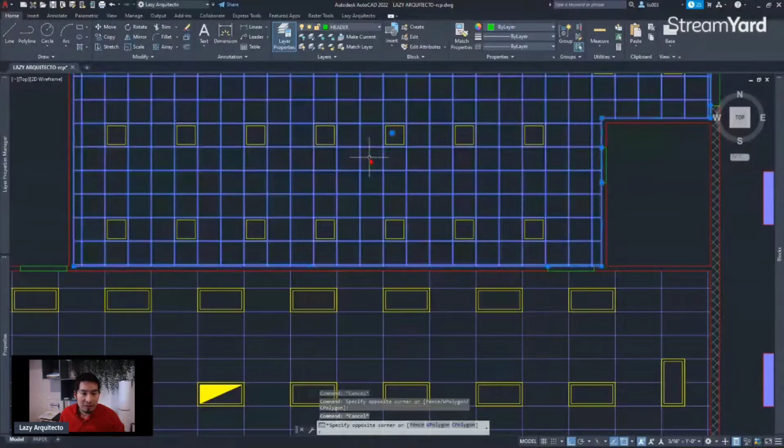So I found this drawing the other day where the ceiling grid is made out of full of lines. People are still wasting time with examples like this, instead of using a regular hatch for the ceiling grid, they are using single lines. It's not their fault, probably because AutoCAD doesn't have a ceiling grid like this by default, but they do have one. So probably they didn't know how to create it. That makes me sad because I know for sure people are wasting time creating these ceiling grids line by line.

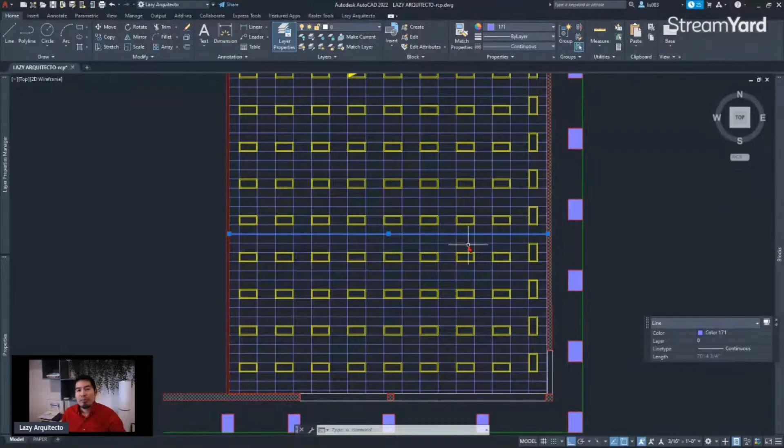So today my plan is to show you how to create custom hatches. First I'm gonna explain an easier way, and then the second way is gonna be more complex and advanced, including coding. And finally, I'm gonna give you some troubleshooting tips and tricks to create your custom hatch, because it's a little hard or complex in AutoCAD, so you can finally create the hatches you wish. All right, let's start.

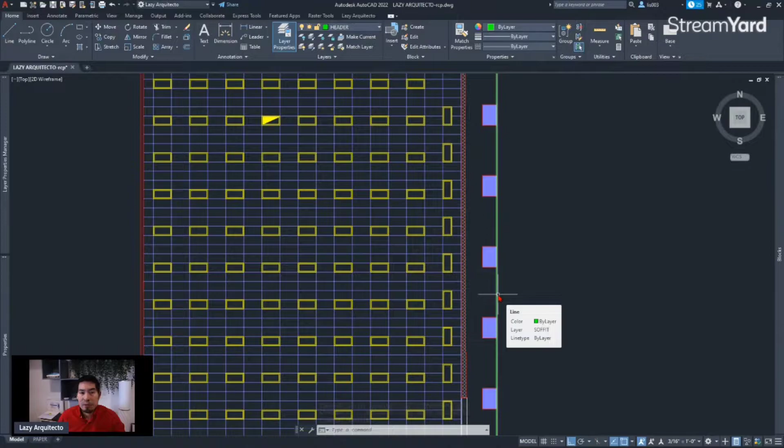Let's start with the first way to create custom hatches in AutoCAD. For this, we need to create a block. First, what we're gonna do is create a square using the regular line command that is 1 unit.

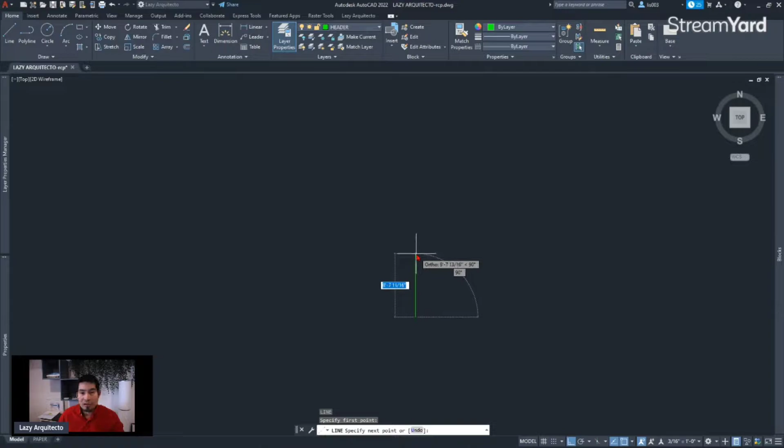So 1 unit up, and then 1 unit to the left, and then close that square of 1 unit. It depends on your AutoCAD units. Right now in this drawing I have inches as my units, so that's what AutoCAD is using.

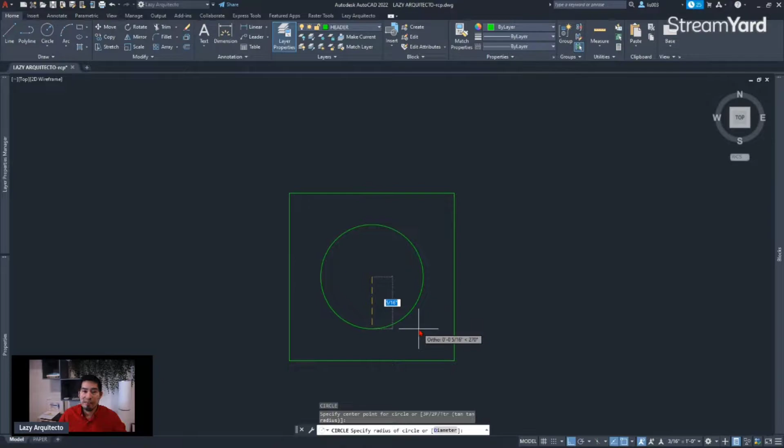All right, once we have this square, we're gonna create whatever object or shape we need for this hatch. For this example, I'm gonna simply draw a circle using the circle command. I'm gonna come here and, using my extension lines, place it in the center like so. For the size, it doesn't really matter, this is just to give you an example. So I'm gonna click like so.

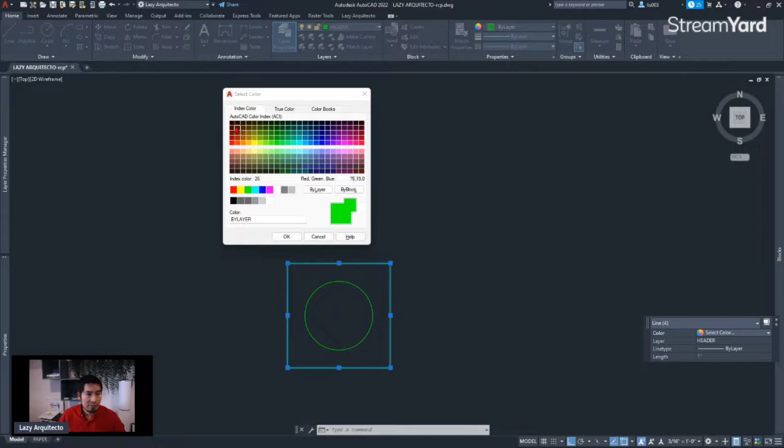Again, the square is simply a guideline, so I'm gonna change the color just so you don't get confused, and make it very light, probably something like this. That's a guideline I need to create my hatch, but I want the circle only to be my hatch.

Okay, once we have that, let's simply create a block using the B shortcut and press enter. Let's call this circle hatch or whatever, this is just an example, but you can create any shape that you need.

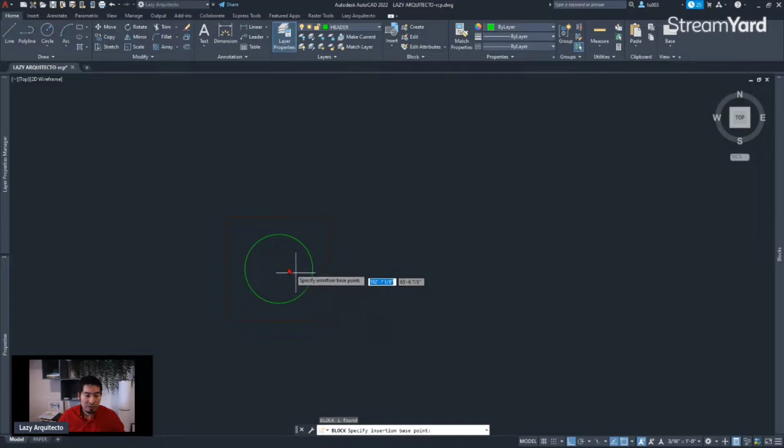Once we have that, let's specify the insertion point. The insertion point for my circular hatch is gonna be over here in this corner. I'm gonna click there, and I already have my block.

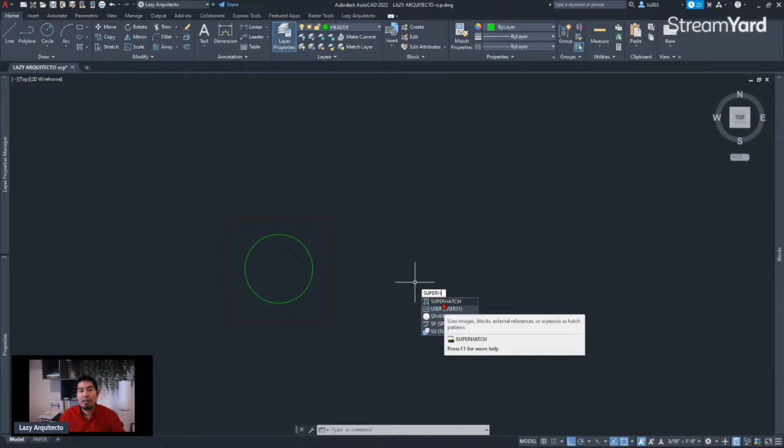So now to create this custom hatch, I'm gonna simply use the super hatch command. You can also find this command on the ribbon. If you go on Express Tools, you will see it over here, super hatch.

If you click or start the command here, we have many different options, but what we want to pick is the block option. Once you select block, automatically your last created block is selected over here, circle hatch. If it didn't select it, you can pick block and find it over here, select circle hatch, and click OK.

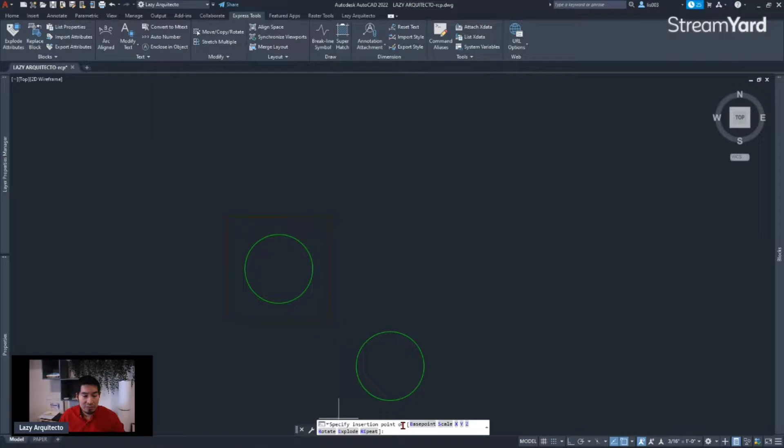At this point, pay attention because we need a lot of steps to create this hatch. Just pay attention to the command line and the steps that we're gonna need. Once we have that, let's follow instructions on the command line, and it says specify insertion point. So the insertion point that I want is gonna be over here.

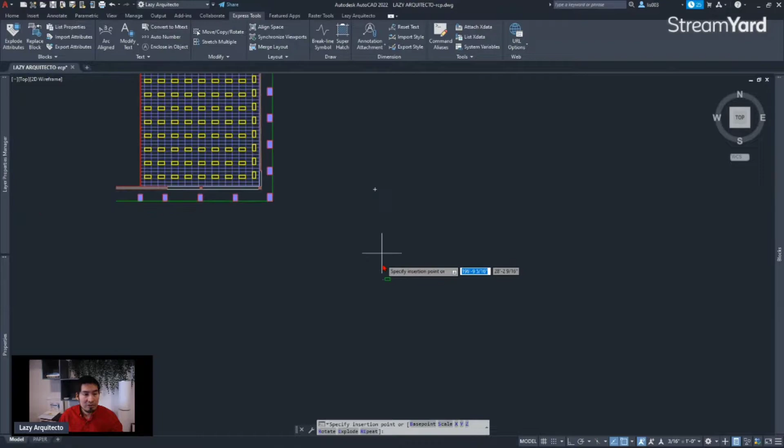Sorry, the insertion point is of the area that we need to hatch, right? So I draw a big square over here, so the insertion point would be in this corner. That's what I wanted, so I'm gonna click here once.

Then it says specify a scale factor. I wanted to have it as 1, so I'm gonna type 1 and press enter. For the Y scale factor, also 1 and press enter. For the rotation, 0 and press enter.

Okay, so it says, is the placement of this block acceptable? I'm gonna say yes. And now here on the command line, it says first corner of magenta rectangle, right?

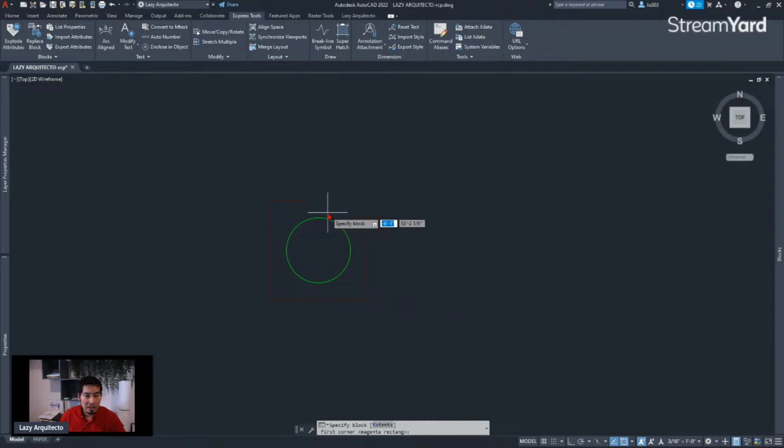So for this, I'm gonna need the guidelines that I created before. So the first magenta corner is gonna be here, click, and then the other magenta corner is gonna be over here, click. So once I have that, it says specify first corner again, but it's a little confusing, but we already did, so just press enter.

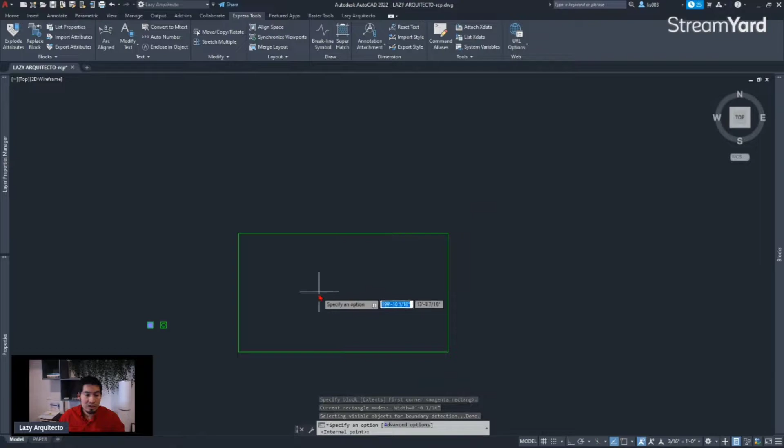So now it's asking for the internal points. Of course, that's the area that we want to hatch. I'm gonna click over here and then press enter.

So once I do that, again, more steps. Are you sure you want to do this? Yes, of course. And then AutoCAD is starting hatching this object with our circle block that we just created. So again, as you can see, it's right here.

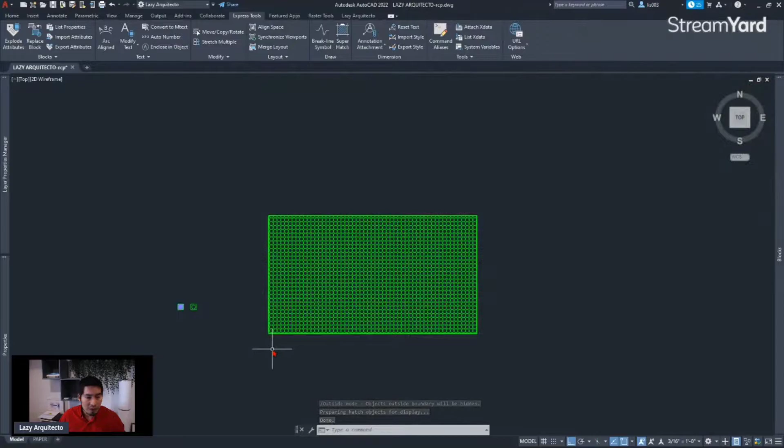But again, it creates a group over here, if you see on the property lines, which is one of its disadvantages. So the advantage, of course, is that using the super hatch is easier, but the disadvantage is that this is a group and not actually a real hatch. A real hatch, of course, you could use in another drawing, but in this case, for this hatch, you cannot. Why? Because if you explode this, it's simply a group full of blocks or circles. So that's why we need the second option to create a custom hatch.

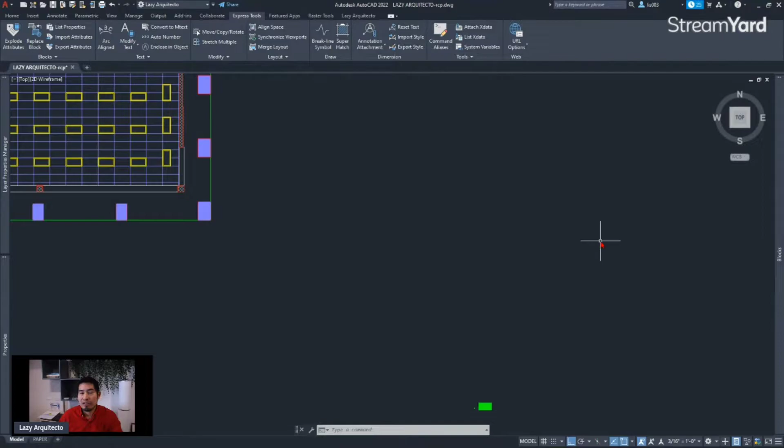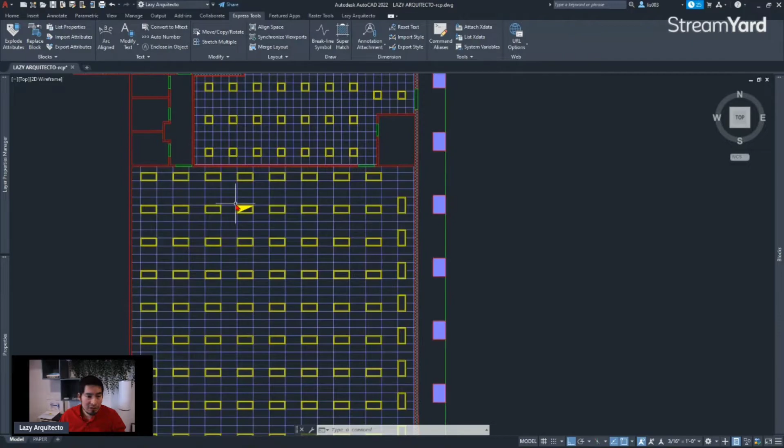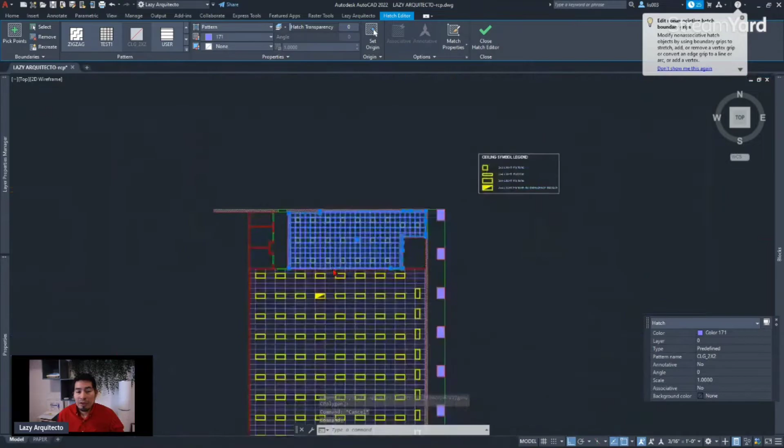All right, so let's start with the second option, which is a little bit more complex, but it's worth it. Let's start with the second way to create custom hatches. For this example, I'm going to create this hatch 2x4, which is very useful for ceiling grids. AutoCAD doesn't have this hatch, only has the 2x2 grid. Okay, so let's start with this one.

So I want to start this hatch, but I'm not going to start from scratch. Again, my idea is always that AutoCAD should already have a hatch code inside, so I need to find it and start from there. I'm not going to waste time starting from a brand new file and creating my own code, no way. If you are here in the Lazy Arquitecto, you should know that already, that we don't like to waste time, we want to save time.

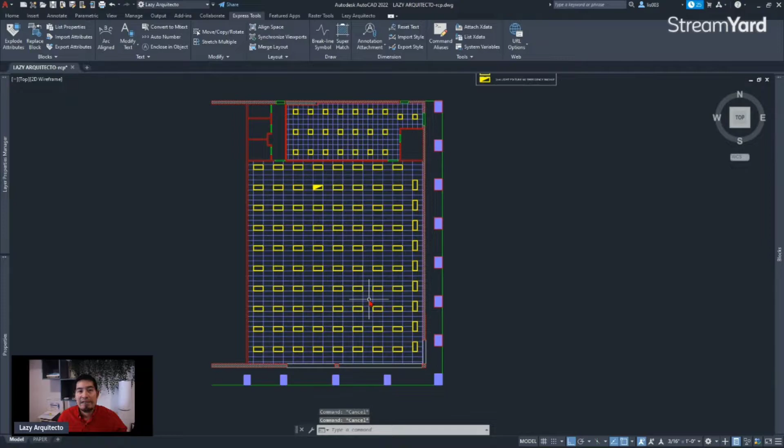So that's what we're going to do. We're going to find the code that AutoCAD uses for creating hatches, and we're going to reuse it to create our 2x4 ceiling. So let me show you. Let's find a similar hatch to a 2x4, right? So let's use the hatch command and go here on the hatch patterns, and let's try to find a useful hatch that we can start similar to a 2x4. And I believe it is this one.

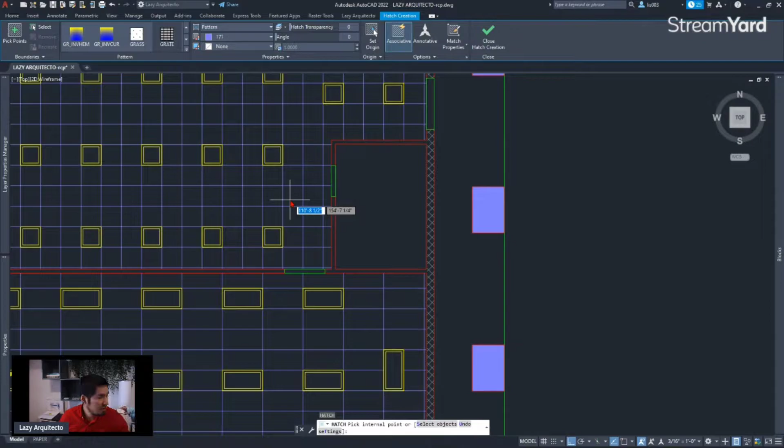Great, so this one is very close to a 2x4. And then, if you get closer, you can see it.

Again, you can see this GRATE hatch. It is close to what we need, so we're gonna reuse this. Remember, the name is GRATE. So what we're gonna do is go to the options, type OP and press enter.

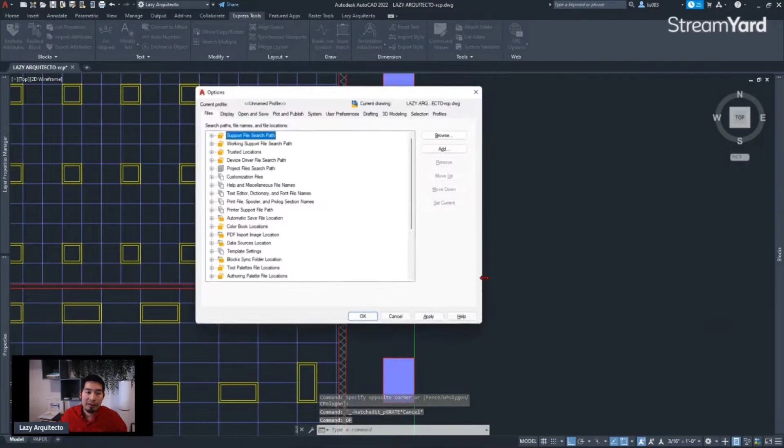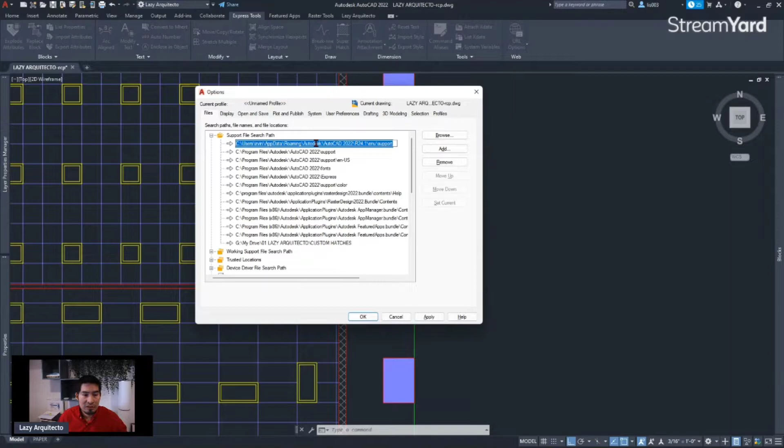On the support file search path location, based on my experience, I know the hatch patterns or hatch files where the code is stored, it's on this path. So what I'm gonna do is press F2 and Control C to copy that path. Once I have that path, I can simply close this.

Now what I'm gonna do is open a Windows Explorer folder. It's right here, and I'm gonna paste that path. Once I do that, simply press enter. The hatches or hatch pattern file is gonna be over here.

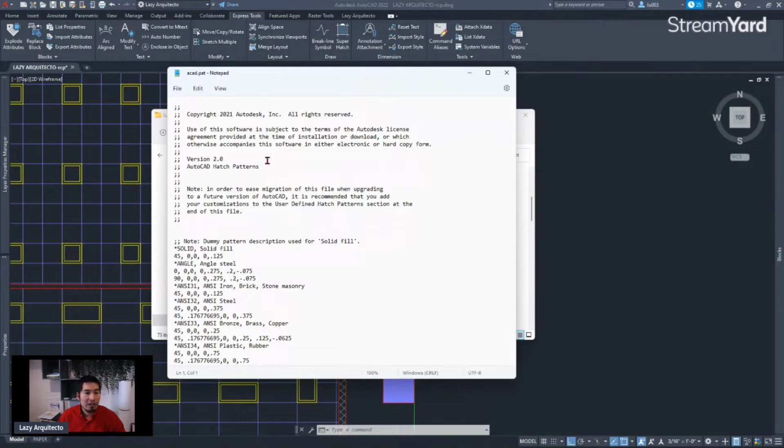So let me find it. You can recognize it because it has the PAT file extension, so that's how you know it's a hatch pattern file. It's right here, acad.pat. Let's open this. I'm gonna open with Notepad. Once I open this, I'll have this file, and I found it. I found the code for all of the hatches inside AutoCAD.

As you can see, this is the coding that AutoCAD is using to create those custom hatch patterns. And of course, a 2 feet by 4 feet ceiling grid doesn't exist in this code, but we're gonna create it.

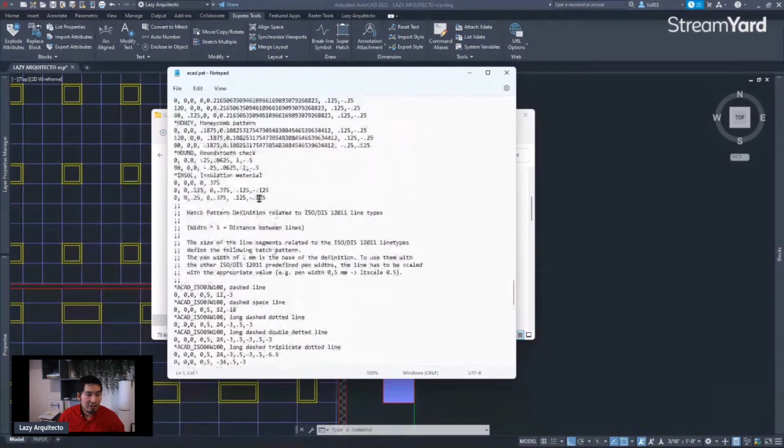So let's find the GRATE hatch pattern. Instead of looking for it, I'm gonna click Edit and Find. Over here I can type GRATE and then press enter, and here it is. We found the GRATE code that we need.

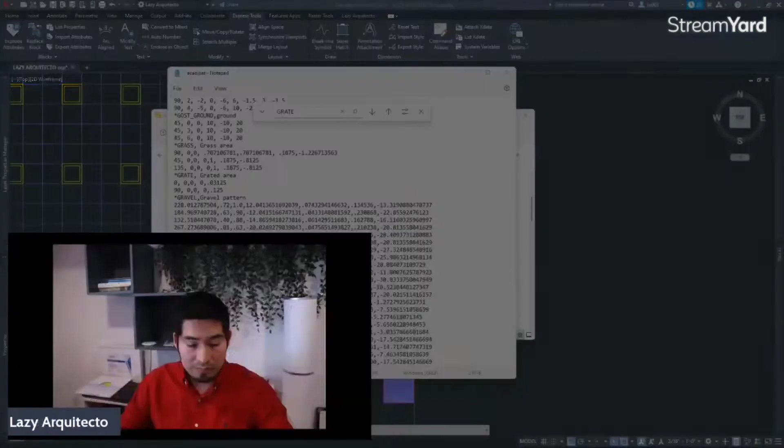So over here, first I want to tell you something important. I'm sad that many people who teach AutoCAD usually suggest creating your code and putting it in this file. But the reason why I would never suggest that is if you create a custom hatch pattern and add it to this file, whenever AutoCAD is giving you problems, you're going to have to probably restore AutoCAD to defaults and lose all of your custom hatches that you probably spent a lot of time creating. So you never want to do that.

Let me show you a way to create your custom hatch patterns and save it in a location where it doesn't matter if AutoCAD crashes or doesn't work and you need to restore it, you're still gonna have your custom hatch patterns saved and secure. Let me show you that.

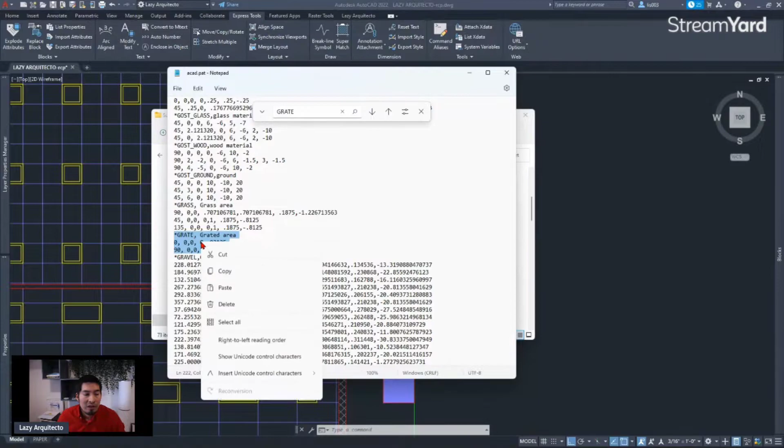So what we're gonna do is copy this grate hatch pattern code up to this part, because over here starts the other hatch, which is gravel. Once we have that, let's simply copy that and we can close this.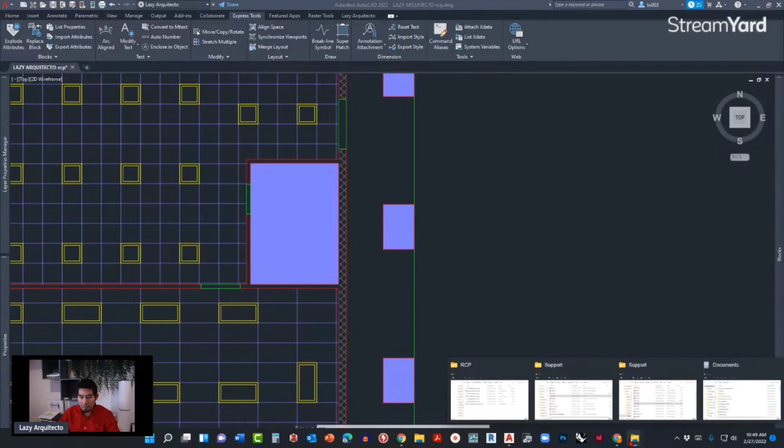So what we're gonna do now is open another Windows Explorer folder, and let me go to over here. In this folder, what I'm gonna do is create a new folder, and I'm gonna call it custom hatch patterns, something like that, very descriptive, right? You can put your name, Lazy Arquitecto hatch patterns, whatever.

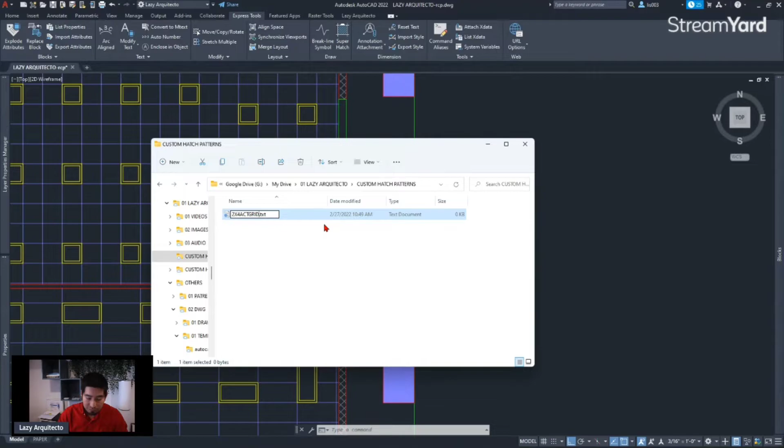So in this folder, we're gonna create a new text document, right? And then let's call this 2x4 ACT grid. Again, try to be very descriptive here. 2x4, that's in feet, ACT grid. Once I do that, I can press enter and open this file.

At this point, again, you never should start from scratch. Never, never, never. So that's why we simply paste whatever we copied from the previous code. Control V, and you have something to start working with quickly and easily.

Okay, so I'm going to explain how this code works so you can change it and tweak it to your needs. The first line, so basically we have a first line, second line, and third line of code. The first one is to have the name of the hatch and a description of the custom hatch.

Right now it says grid. Let's change that for 2x4 ACT grid. Here the important part is that the name of the hatch needs to be exactly the same name as the hatch file that we renamed. So 2x4 ACT grid, that's exactly the name we need to use here on the name, okay?

So then for the description, of course, we can say something like ceiling grid or 2x4, whatever, 24 by 48 inches ceiling grid. The important part here in the description is that you need to divide the name from the description with this comma. That's very important for the first line of code.

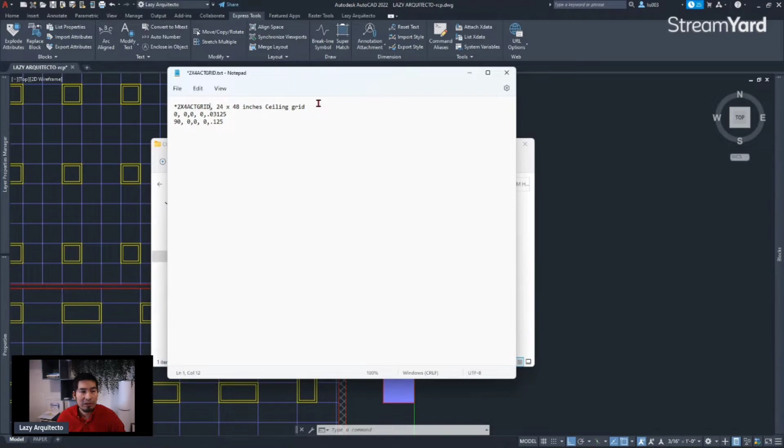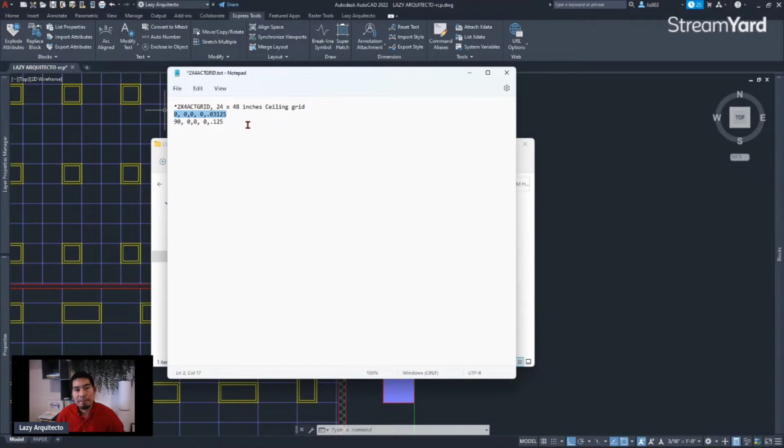That's very straightforward, right? So that's clear, I guess. I explained it, I tried to make it simpler. But for the second line of code, that's the horizontal line that we're gonna draw. So if we go to AutoCAD, let me show you so you can see this better.

Let me try to divide my screen like this so you can appreciate or understand better.

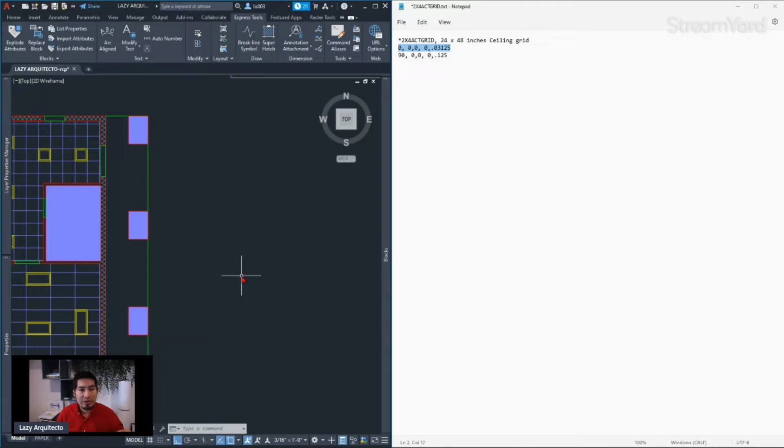So the second line of code, like I was saying, that's the horizontal line that we're gonna need. For the horizontal line, if we go here right now to better understand, this is the grid hatch that was used with this code, and that's what is drawing right now, this line.

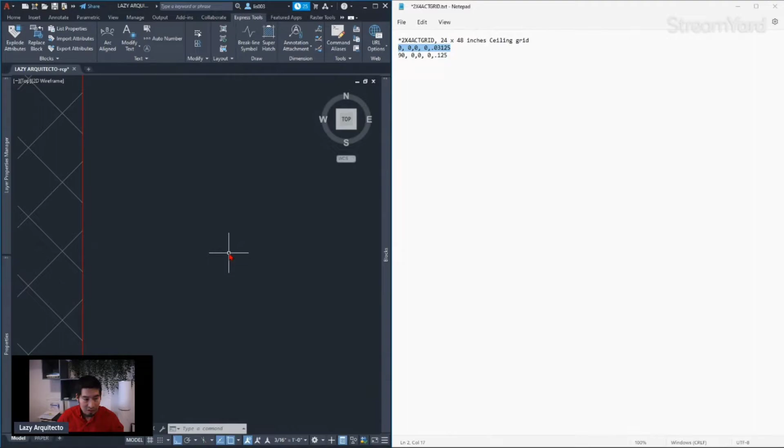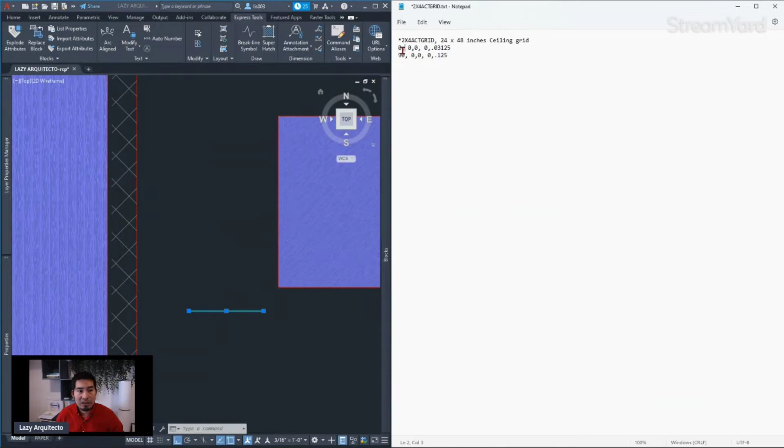But what we need is the horizontal line for the 2x4. What I'm gonna need is 24 inches to the right. So the first number is gonna be the rotation of the line for this hatch. This 24 line for the ceiling grid is at 0 angle, so that's good, we need that 0 in this case.

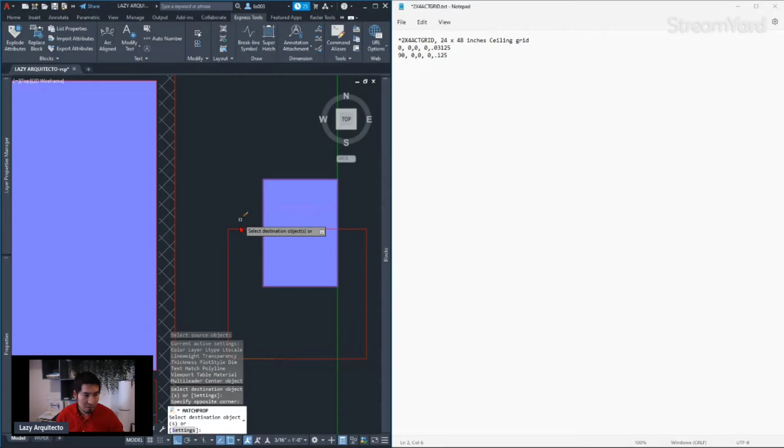And the second one, we know the first is the rotation, the second one is gonna be the origin coordinates. So for instance, if we draw a square, or a rectangle sorry, I want to make it in a different color so you don't get confused, and I'm gonna move it somewhere over here. Let me change the color of this so you can see better.

So that's the ceiling grid, and it's starting at 0, 0, which is this point over here. Let me draw a circle so you can see better. So that's the starting point for this line, for this horizontal line, remember?

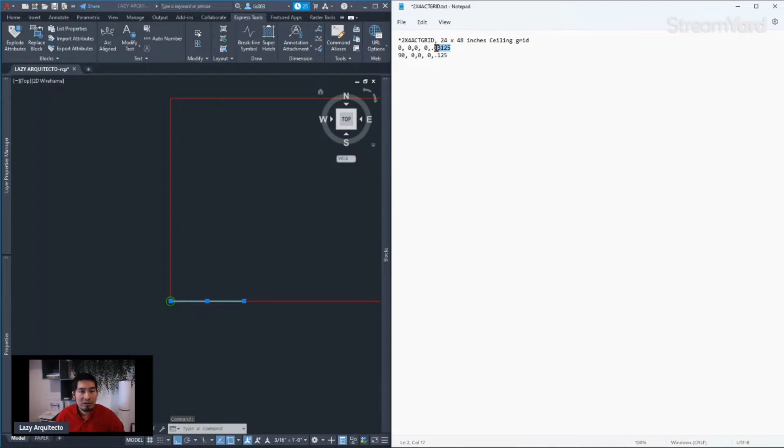Okay, so the next one is gonna be the length of this line. For the grid, the length was .03125, but for this we're gonna need 24 inches. So what we're gonna do is remove this and type 24. That's based on the units, and this drawing is in inches units, so we need 24.

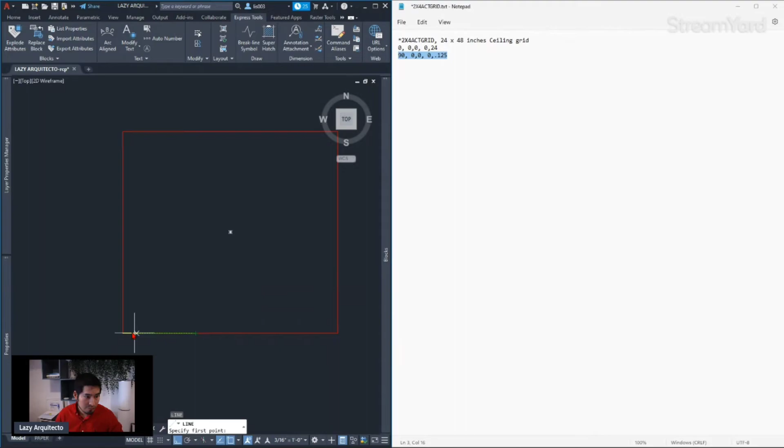So basically the first line of code will draw this line for our hatch. Now the third line of code, which is this one, will draw the vertical line for our ACT. Let me draw it so you can see better. So I'm gonna draw 48 inches up.

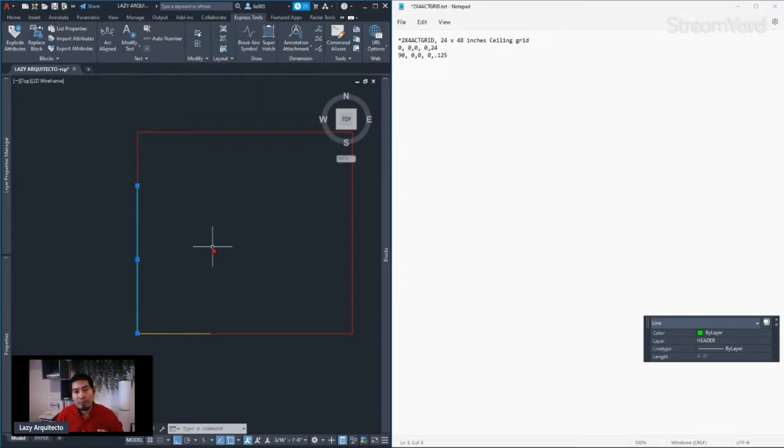So this code is saying 90 for the angle because this line needs to be on a 90-degree angle, which is here, right? And then the starting point is saying at 0, 0. Now, the starting point, it's very important that you understand this: it's not based on this rectangle, but it's based on the previous object or line, which is this one.

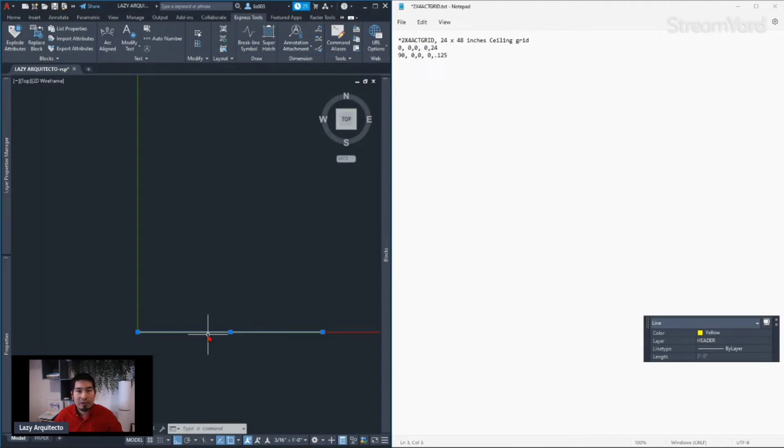So that's why it says 0, 0. That's good for us because we want to start it over here. So again, it's referencing the previous line, not the rectangle. We want to start from there.

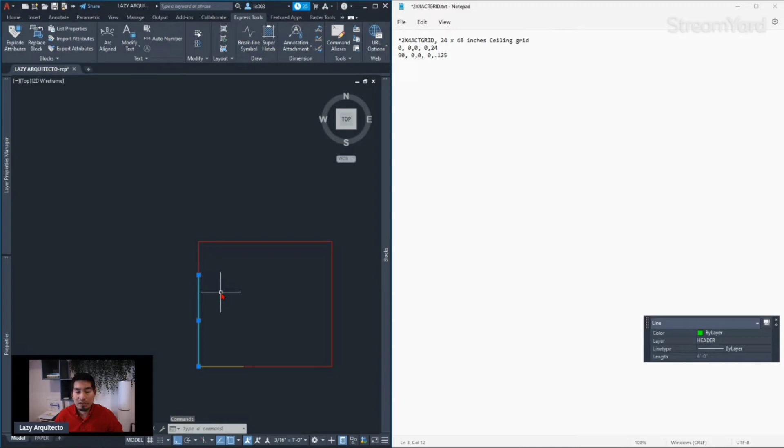And then finally, for the length of our line, this line is gonna be 48 inches, for a 2x4 ceiling grid. So here we're gonna need to change this number to 48. Now that's the code that we're gonna need, but an important step here is that we need to end our code with a space, an enter, or a return. So let's do that, we're gonna click over here and press enter.

Once we do that, we have two options to make this text file a PAT, or PAT hatch pattern file. We can either save as or rename the existing, but we're gonna do save as. So once we do save as, let's rename this file extension to PAT, that's for the hatch pattern that AutoCAD uses, and then we can save.

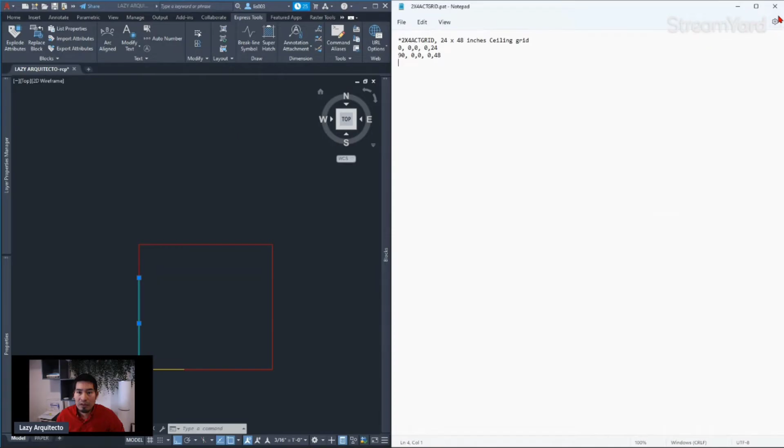So we can close this file now and go back to AutoCAD, okay? So here in AutoCAD, let me go back to the folder.

So this is what we created. And of course, we don't need any more of this text file extension. I can remove that, but this is what we need. All right, so we're almost there.

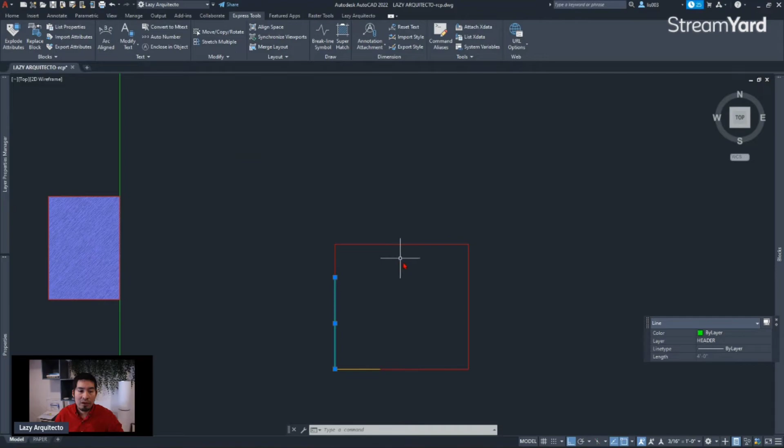Now what we need to do is add a path inside AutoCAD, so AutoCAD can find this custom hatch pattern folder. We're gonna click over here and copy that, go back to AutoCAD, type OP and press enter to access the options, and expand the support file search path.

Over here we need to add a new path, and we're gonna paste whatever we just copied from Windows Explorer. Control V to paste - that's your hatch patterns folder - and press enter. This is very important because if not, AutoCAD won't recognize that you have custom hatches somewhere in your computer. So then apply and click OK.

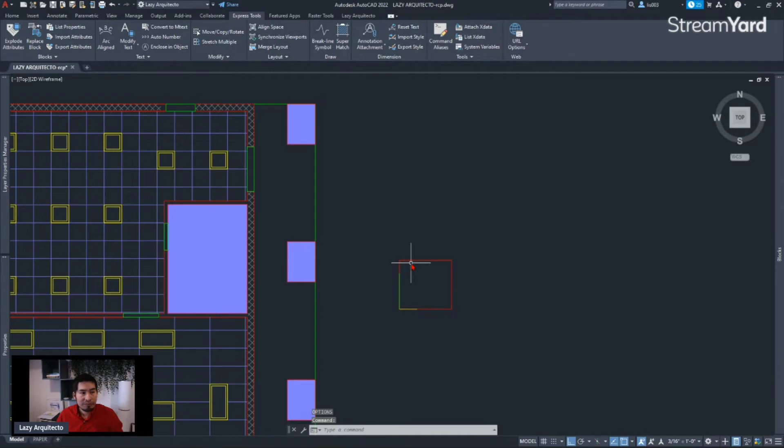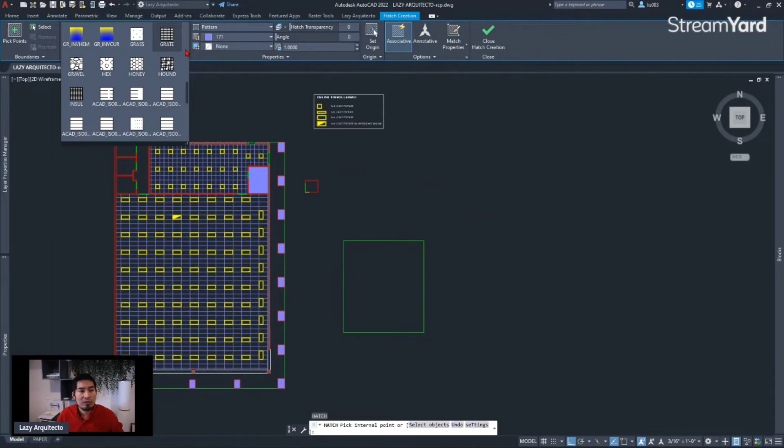So we're almost there. Now let's create a rectangle to hatch, to test our hatch and see that everything is looking right. Let me type H for hatch, and let's see if we don't have any problems finding our hatch over here.

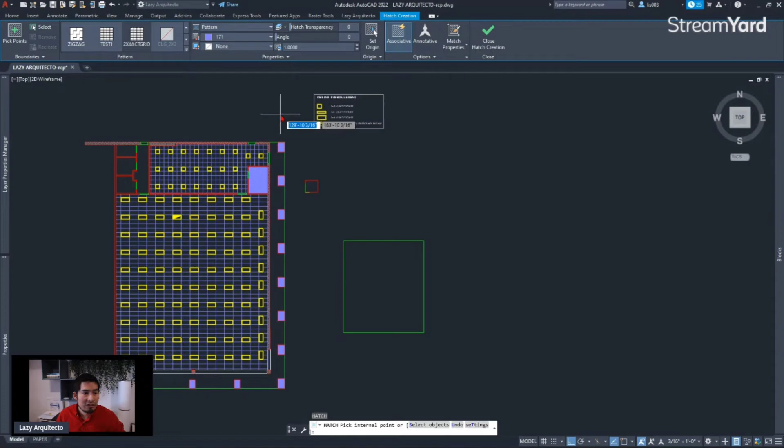So we rename it, 2x4ACTGRID. Here it is - it's right here inside AutoCAD. And you're never gonna lose it, even if you restore AutoCAD, your custom hatch is always gonna be secure for you to use. So let's click on it and click over here to accept that. And of course, that's your hatch, your 2x4 ACT grid.

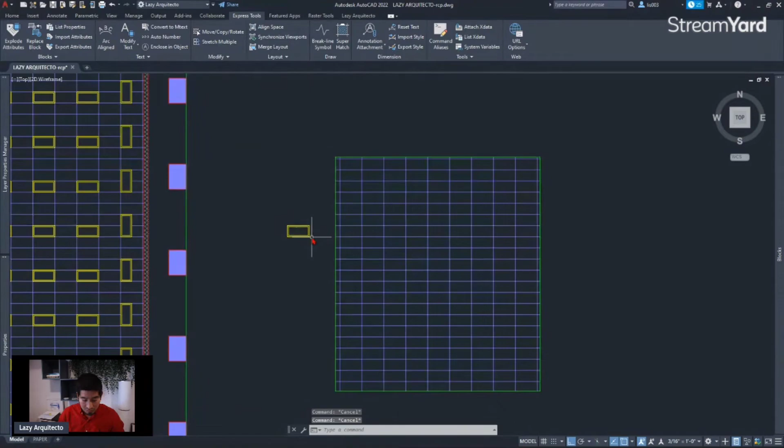So at this point you can place your lighting and you'll be ready to go. A tip is to use... so that's if we explode this, just to check or double check, and we dimension this.

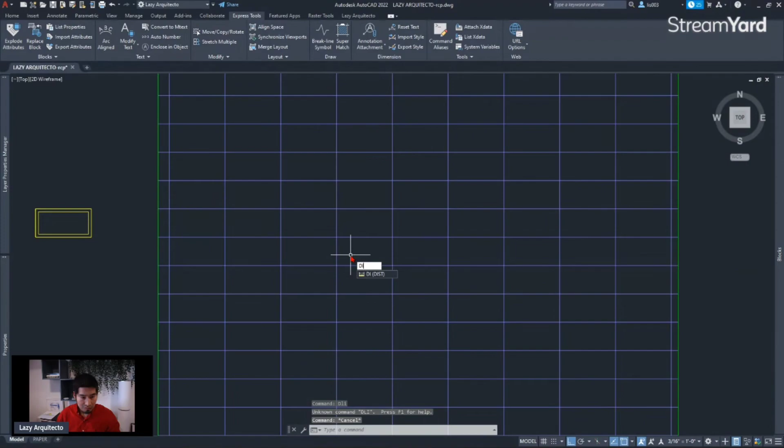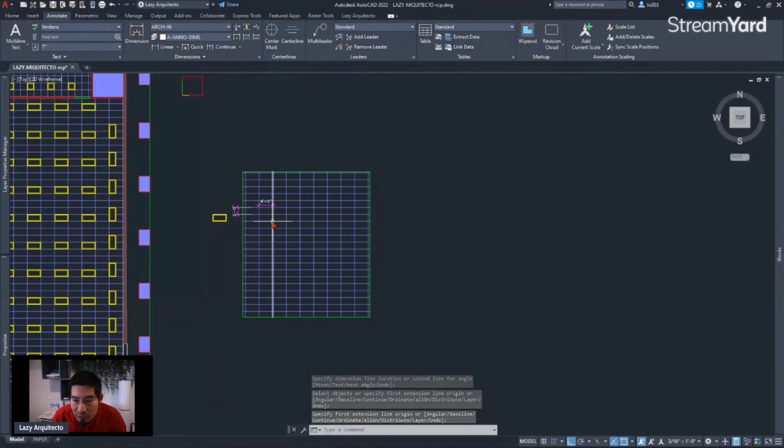Oops, for some reason I cannot use my dimension. Let me go here on the annotate tab and use the dimension from here. You can see that it is 2 feet by 4 feet. Great, right? So those are two ways that you can create your hatch patterns, and of course you can use this hatch pattern with other computers and so on.

But now let's go with the final steps, which are troubleshooting tips or tricks, because you're probably gonna have problems, especially when creating these custom hatches with the final technique, which is the coding. So let me give you some tips and tricks that are going to help you so you don't have headaches. Okay, so let's start with those.

Let me open first the file that we were using over here. The first troubleshooting trick I want to give you is: never forget to add a space or a return on the final line of your code. That's very important, because if not, AutoCAD won't find your hatch. Okay, so remember that - always add a return or a space.

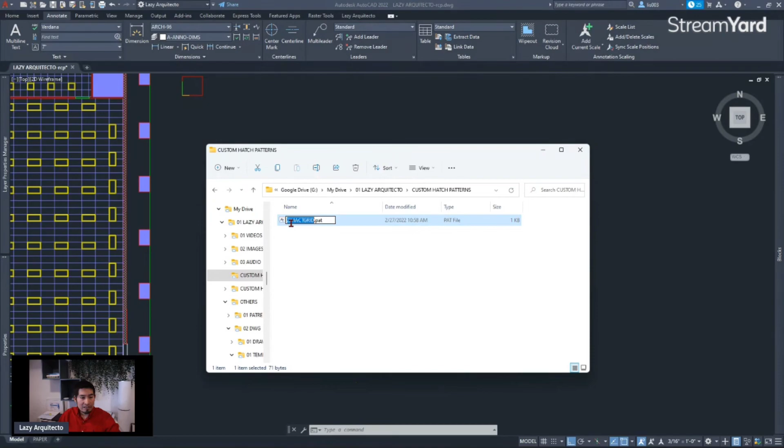So the next one is: always have the name of your hatch pattern file match the inside code name. Right now this name is 2x4 ACT grid. Always have that name match the inside code name. So if we go here, this name of the hatch needs to match the file name. Make sure that's matching so you don't have headaches trying to create a custom hatch.

So let's go with the next troubleshooting trick. Sometimes AutoCAD, even though you follow all of these steps, won't recognize your hatch. A way to fix this is to close AutoCAD and reopen it, so that AutoCAD can refresh the path that you just added and recognize your hatch. That's the third technique - if you did all the steps and still cannot find your custom hatch, close and reopen AutoCAD, and probably you will find it this time.

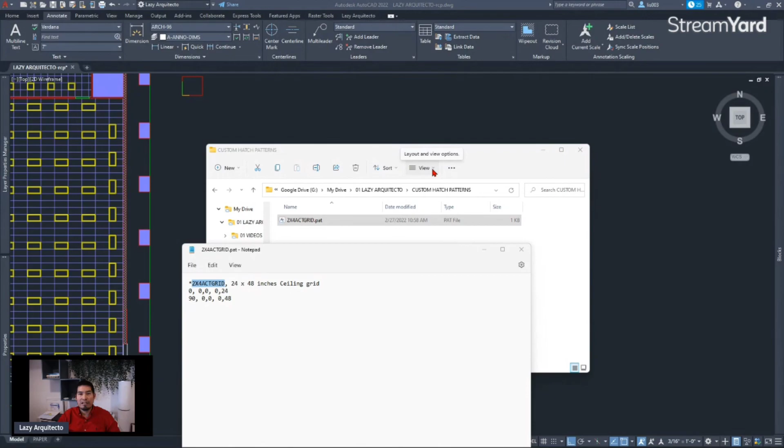So those are 3 troubleshooting tricks that you should know in order to create your custom hatch.